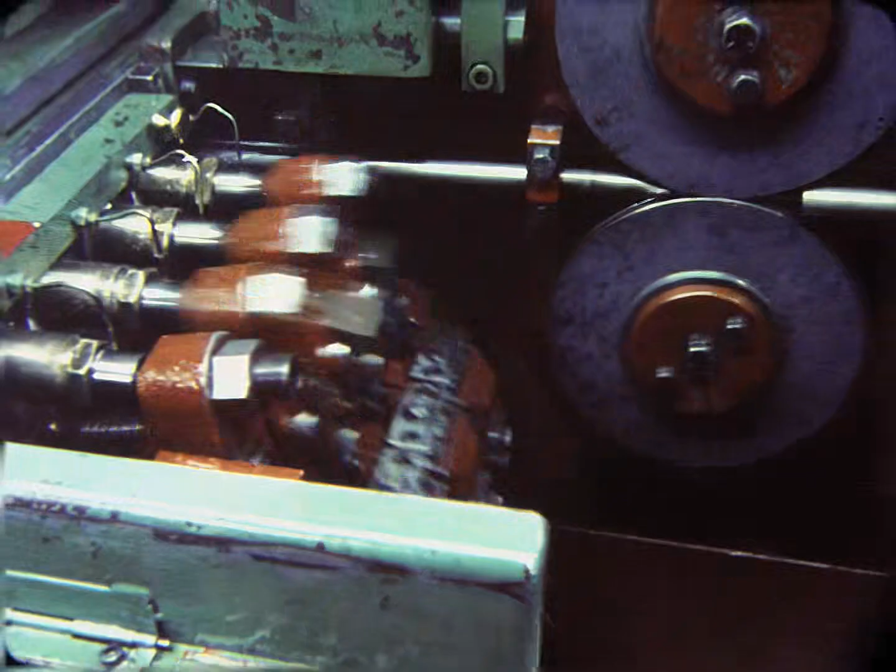The American Society of Mechanical Engineers is a non-profit educational and technical organization of more than 100,000 members. Approximately 85,000 are practicing engineers, and 20,000 are engineering students.

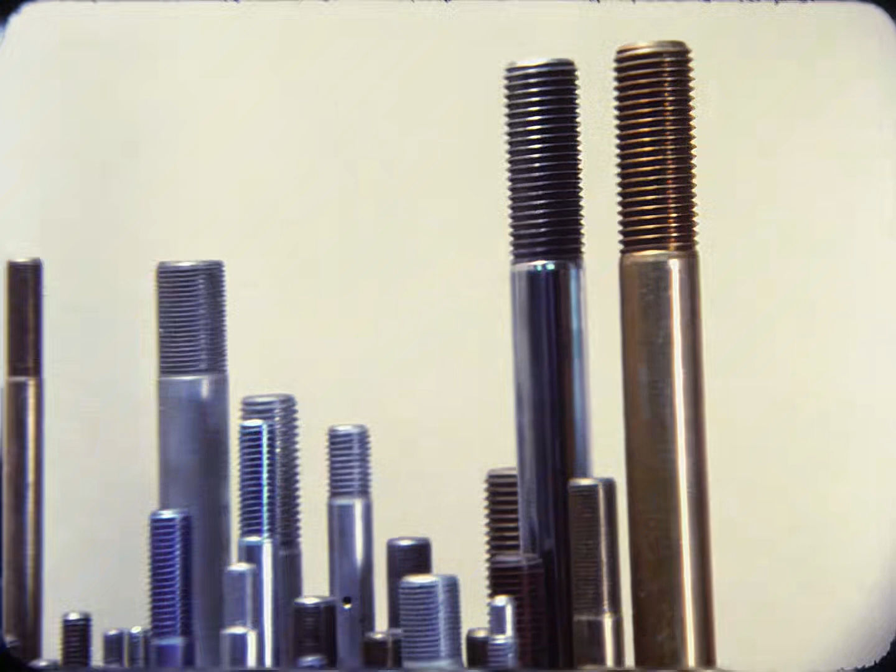ASME has a wide variety of programs: publishing, technical conferences and exhibits, engineering education, and the development of codes and standards, all aimed at serving the profession, the public, industry, and government.

At the Society's headquarters in New York, they're talking about a calendar landmark. ASME Codes and Standards had their birth 100 years ago, when the first performance test code was issued.

Earl Kemmler is a past vice chairman of ASME's Boiler and Pressure Vessel Committee. Ed Bethel is an expert in the field of elevator inspection. Marilyn Weber is on the staff of the American Nuclear Society. Bill Wollicott is ASME's Assistant Managing Director of Codes and Standards.

We've been talking to each other in this Codes and Standards business for about 100 years now, and our centennial's coming up. We've got to find a way to tell people what we do. What will they understand when we talk, for instance, about a boiler? And why are they interested in a boiler? Or why are they interested in an elevator, except that it takes them up and down and then they don't have to walk up and down the stairs?

Basically, what ASME is doing in elevators is attempting to get uniform and safe elevators in our country.

You were talking a little bit earlier about a fire, when they brought some outside fire companies in. They had a very large fire, and as often happens, they had to get help from a neighboring town. When those out-of-town firemen went to hook up their hoses, their couplings wouldn't fit the hydrants. Of course, the blaze got out of control. It was almost as if an old-fashioned bucket brigade would have been more effective.

No matter how sophisticated or modern the firefighting equipment, you must connect the hose to a water source. So we began to understand that just the threads became a very important thing to be standard.

Bill, I think it's important that in citing the various interests that participate in the development of standards and codes, people in general recognize that among those committees are also consumers at large.

I guess you could call me a consumer at large. Turn me loose in a big hardware store and I'm apt to go berserk. Oh, not that I'm any kind of an expert as a do-it-yourselfer. In fact, if it weren't for standardization given to us by mechanical engineers, these would behave like thumbs, all ten of them.

Now, we all have a pretty good idea of what a mechanical engineer does. He makes things work: turn, lift, move, and work. But before things can work properly and safely, they have to fit. For over a century now, that's what the American Society of Mechanical Engineers has been doing in an organized way, making sure that things fit and work.

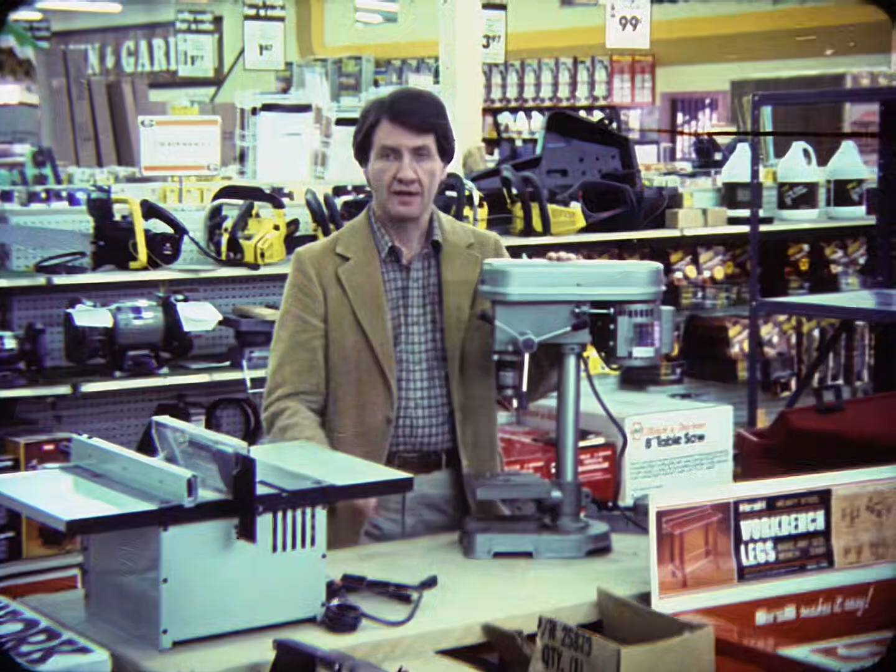Whether it's a bolt and nut, a new bit for your drill, a new pipe fitting, even if you're the most skilled plumber or carpenter, you work with things that are ready-made to fit to the most exacting specification. They fit because mechanical engineers take responsibility for developing standards, without which—well, early Hollywood took a comic look at what would happen without which.

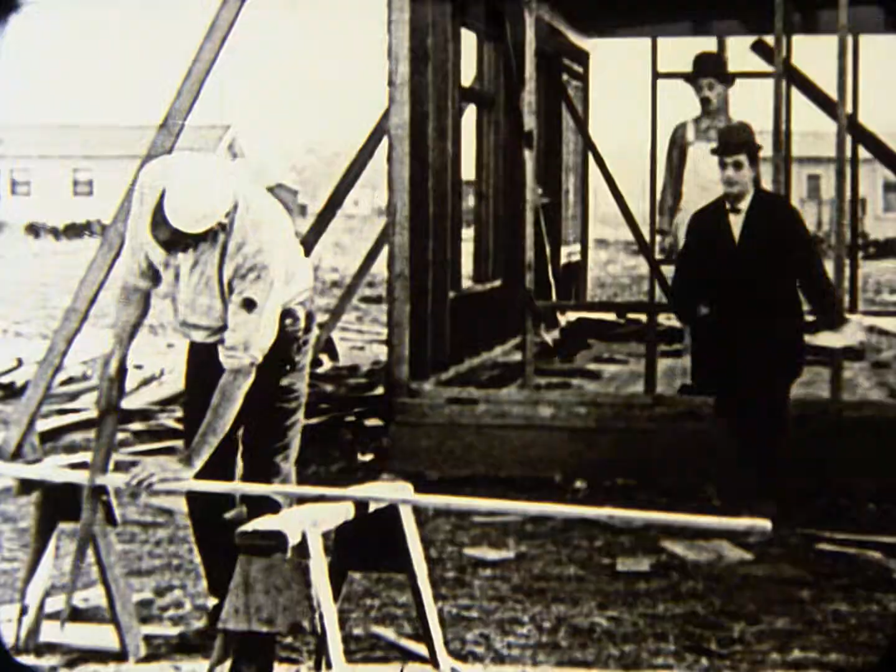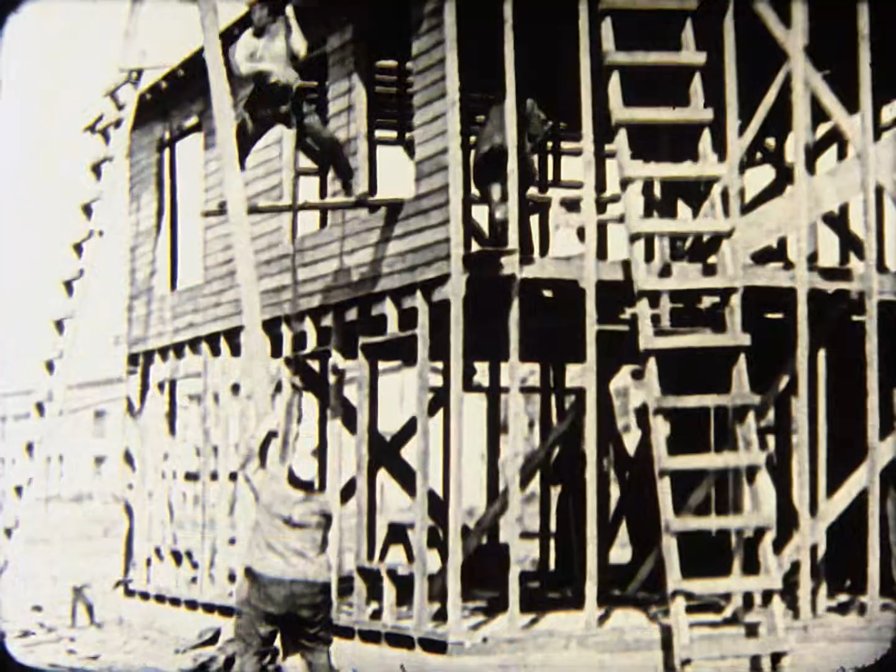Even to my untrained eye, this structure doesn't seem to be going up according to rhyme or reason, let alone professional standards.

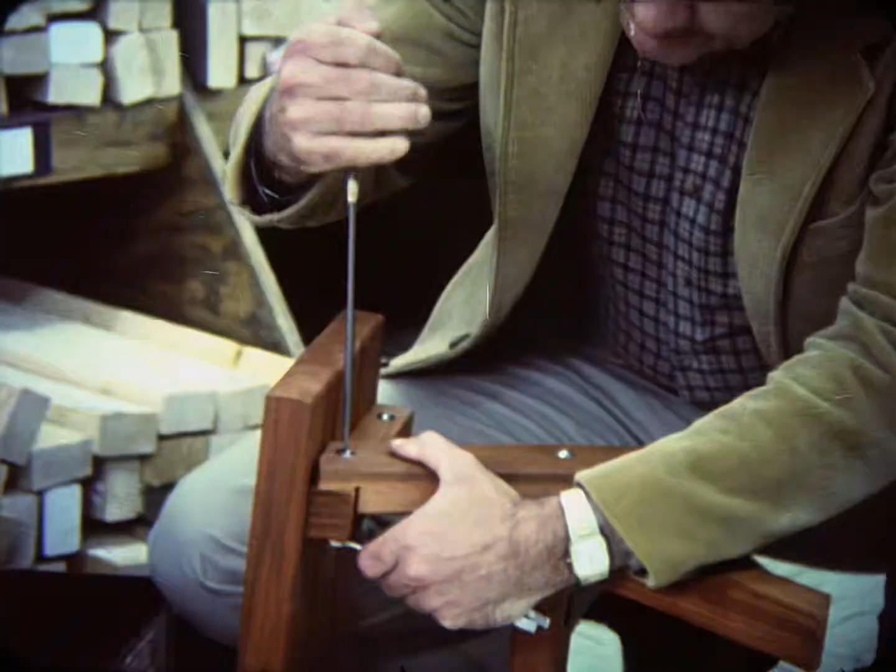I don't think I'd want to audition for a Mack Sennett comedy, no matter how much some folks might think I qualify for the role. See? Put it together myself, and it isn't falling down. Nothing to it.

Before my visit with you is over, we'll be looking at many things, from nuts and bolts to elevators, escalators, boilers, cranes. We won't even be able to cover all of the devices that affect our daily life. The design for these devices and machines have their starting point in common, uniform standards.

These engineers and other volunteers will be serving on codes and standards committees. They are here to learn about some of the issues involved: professional ethics, conflict of interest, and legal considerations.

Going back to 1884, when I used the word code, it was with the intent that it was going to be made part of a legal document. The legal document was a contract. So I think that ASME has followed that from 1884. That's the way I understand the use of the term code.

Each of these code-writing committees is balanced so that all points of view and all interests can be represented at the table, so that the possibility for one group or another to inadvertently or purposefully skew or manipulate the system is diminished, because everybody's there keeping an eye on everybody else.

Today, as always, we are faced with the fact that if voluntary standards are to survive in a free society, we must cultivate the science of human relationships and the ability of the code writers of all categories of interest to work together towards goals which are worthy of an alerted society.

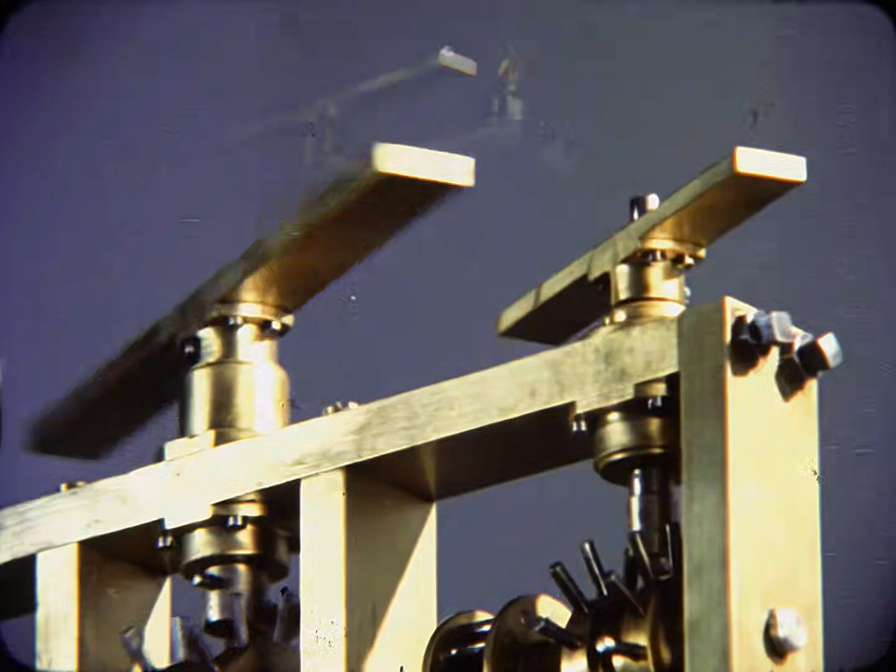A mind like da Vinci's inevitably would have to tackle the measurement of time. He designed a clock with two separate trains, one for minutes, the other for hours, each complete with escapement, gears, and weights.

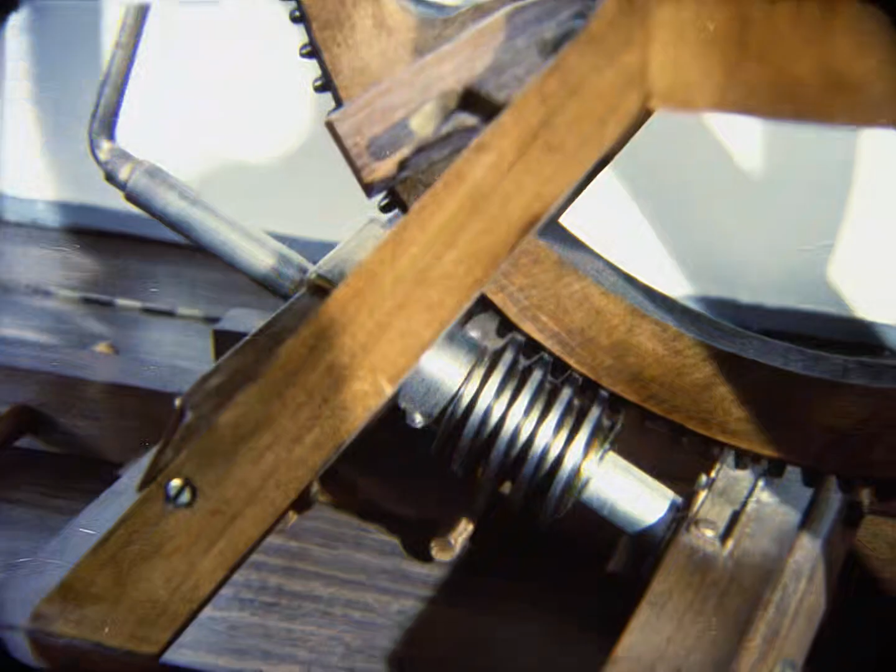Leonardo's scaling ladder, elevated and lowered by means of a crank and large-toothed gear, resembles modern firefighting equipment and cranes.

This rotating bridge was originally designed as a defense against approaching battalions.

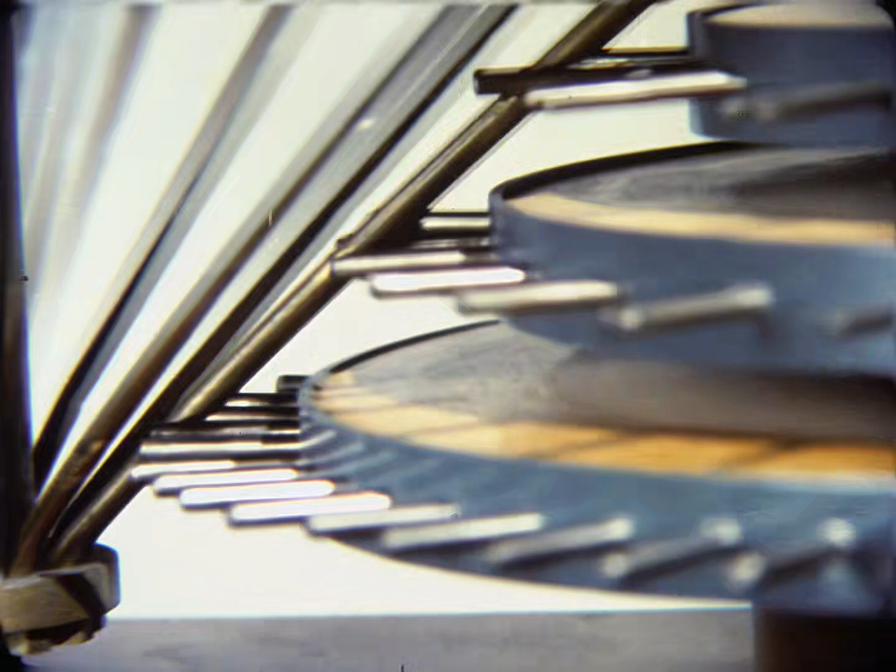By meshing three cogged wheels of different diameters with the same lantern wheel, Leonardo obtained different speeds of rotation, an idea that eventually found its way into the modern automobile. The visionary light that illuminated Renaissance art and science is no less penetrating today.

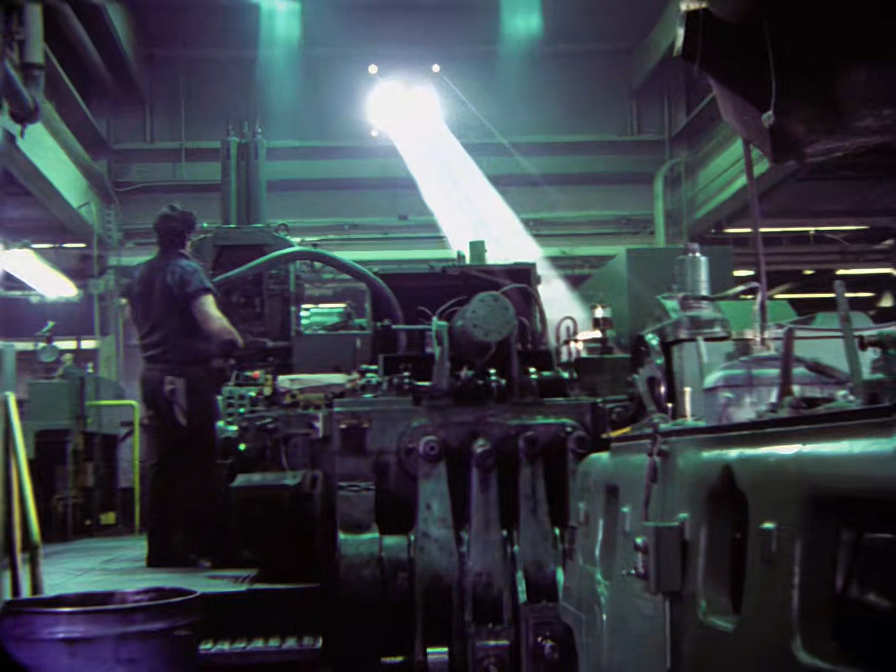Converting a long length of heavy wire into bolts or screws that hold together everything from a lawnmower to a skyscraper is a process that boasts its own magic.

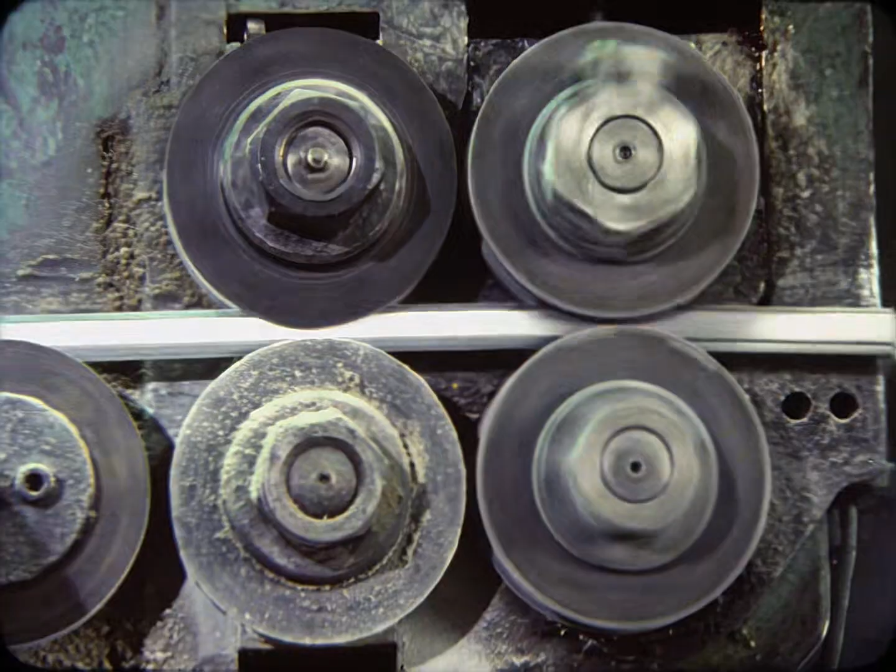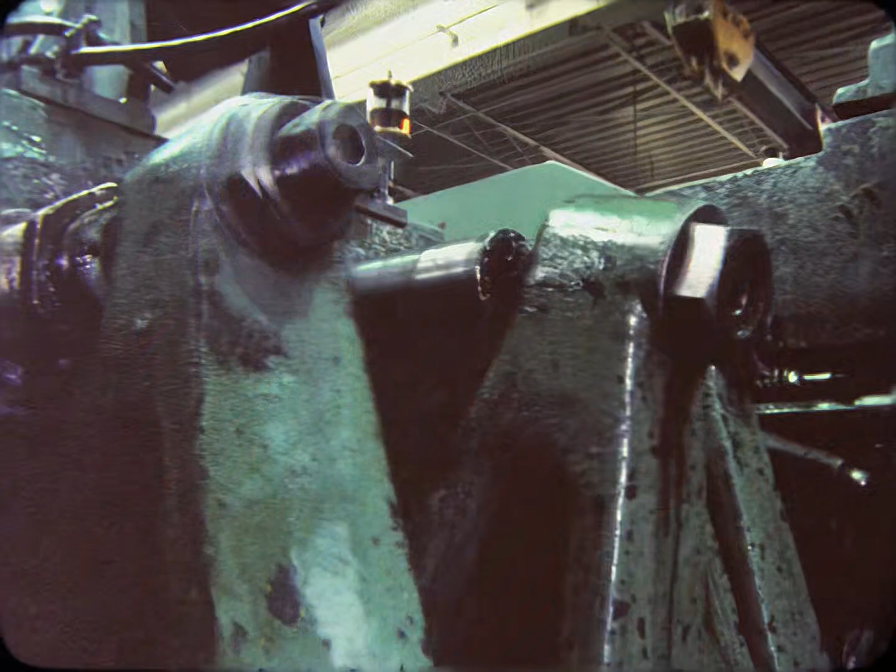With the wide variety of fasteners being manufactured today, it's important that the designer, the manufacturer, and the user of fasteners as well have a good, concise set of standards to work to.

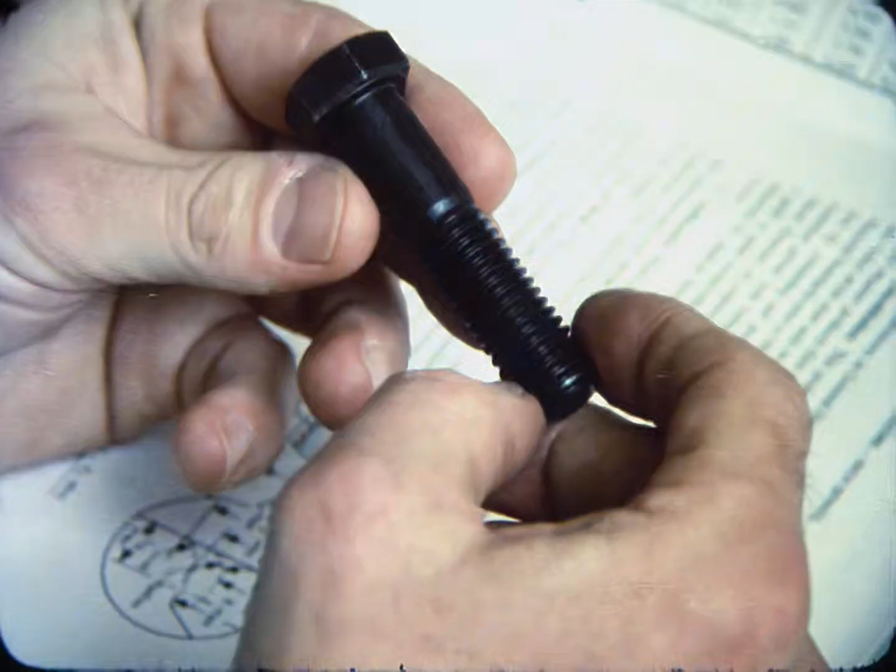The American Society of Mechanical Engineers B1 and B18 documents completely define all the characteristics of a hex head cap screw. Dimensional characteristics such as bolt length, thread length, distance across corners, head height, body diameter, and all of the thread information are concisely contained in both of these documents.

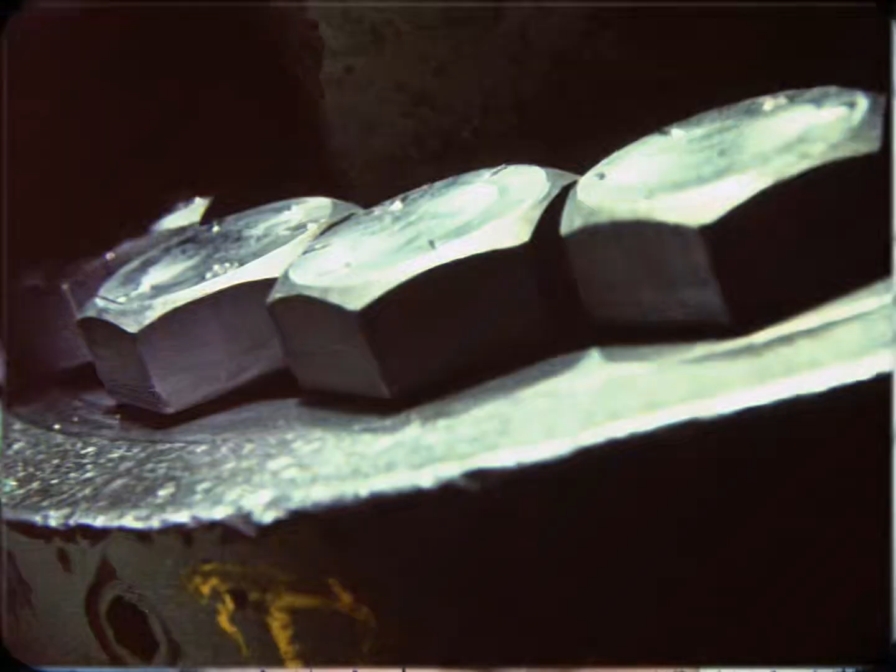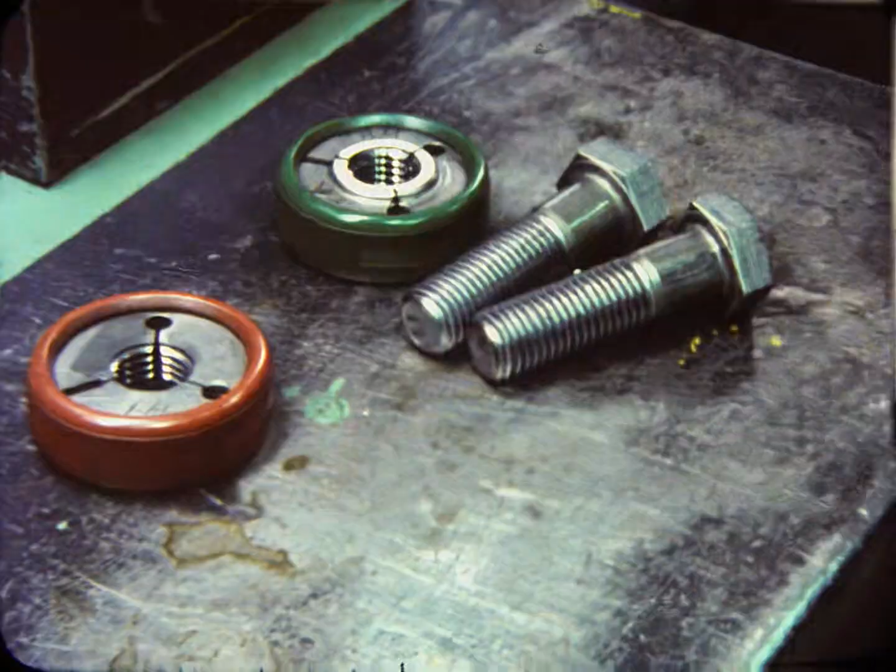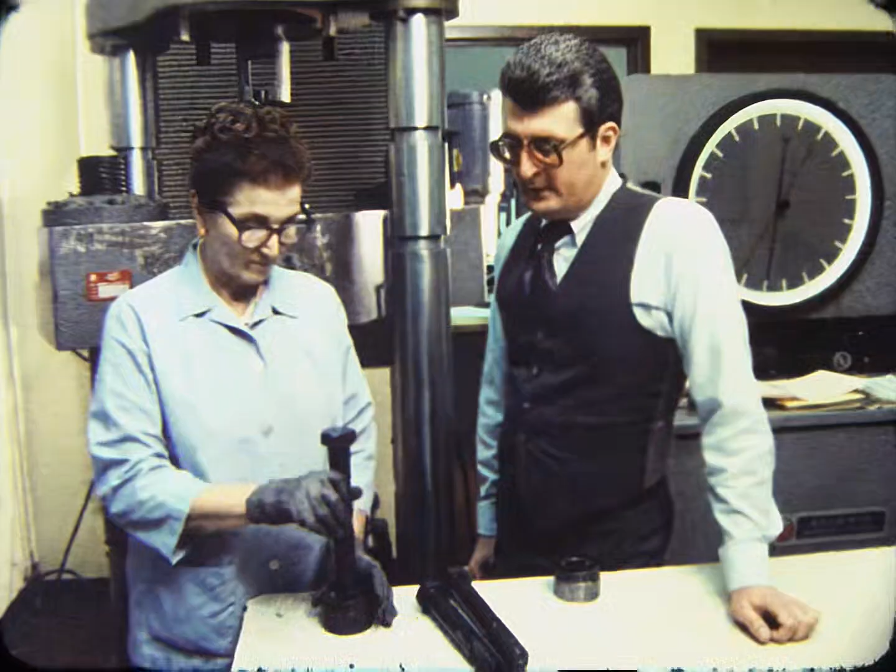Take a bolt and a nut, put them together and they fit. And the reason they fit is because of standards. The tensile test is a mechanical evaluation of the minimum strength properties built into the bolt by specification.

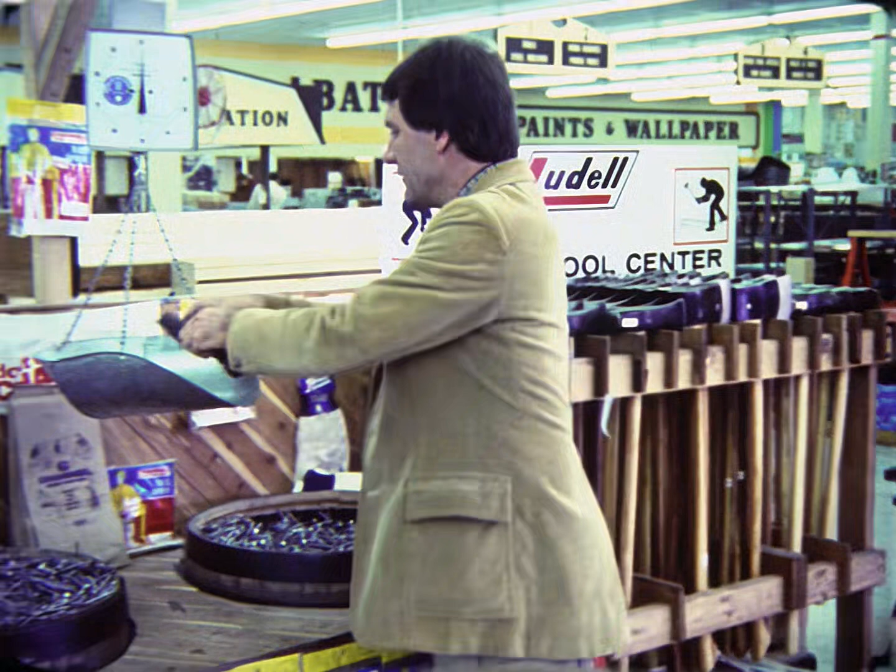You have to know how much weight or stress a fastener can take before it yields. This stress test of a heavy structural bolt will take it far beyond the performance requirements before it snaps. It took 80 tons of force to break this single 4-pound bolt. In manufacture and design, it meets the ASME standard.

Unfortunately, there are no codes or standards that can protect us from human error. Even so, when accidents happen, we have to hope that something man-made will hold.

In New York, witnesses say it felt like an earthquake and sounded like the world was coming to an end. Without warning, pedestrians on 53rd Street were caught in a downpour of rock, glass, and metal as the crane collapsed 43 stories above their heads.

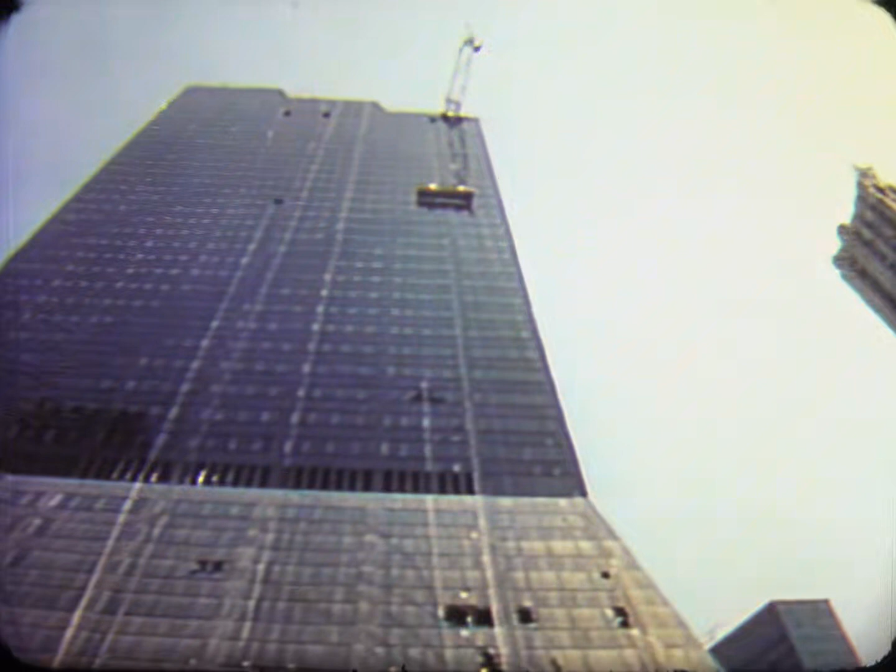The accident occurred a little before 11 this morning at the nearly completed Continental Illinois Bank building. Workers reportedly were dismantling a 130-foot crane when it collapsed on the roof, smashing into the concrete facing. More than a dozen windows in the building were shattered. Windows in buildings on Madison and 53rd were also broken.

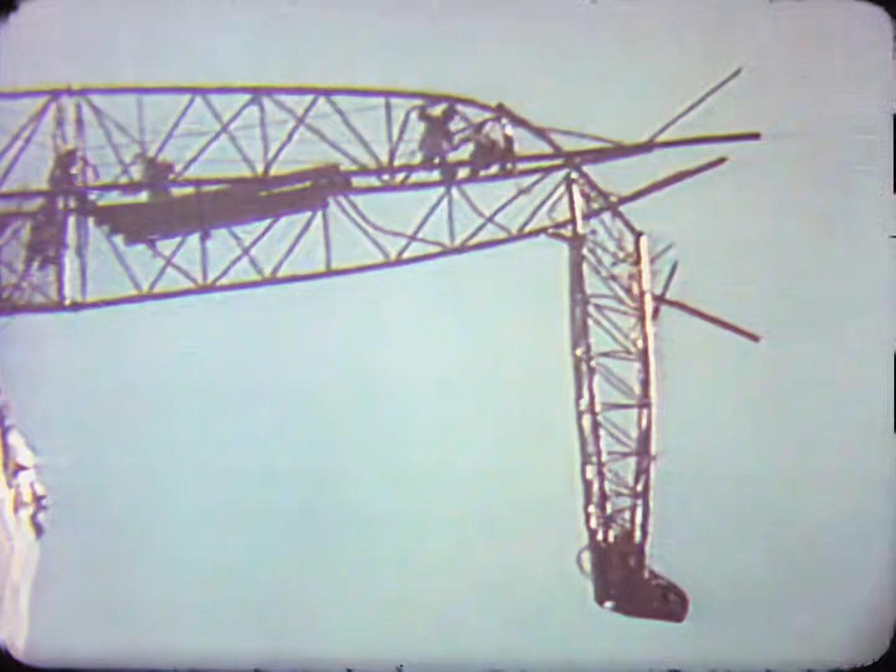Officials didn't know how long the 30-foot section would hang on. After the area had been cleared, construction workers and police were left with the dangerous task of trying to secure a dangling 30-foot section of the crane, being held only by one bolt.

At any given moment around the world, thousands of cranes of every size and description are helping to build and rebuild man's dwellings, office structures, and factories. Among the most spectacular applications of reliable codes and standards, cranes punctuate cityscapes like giant arms flung into the sky.

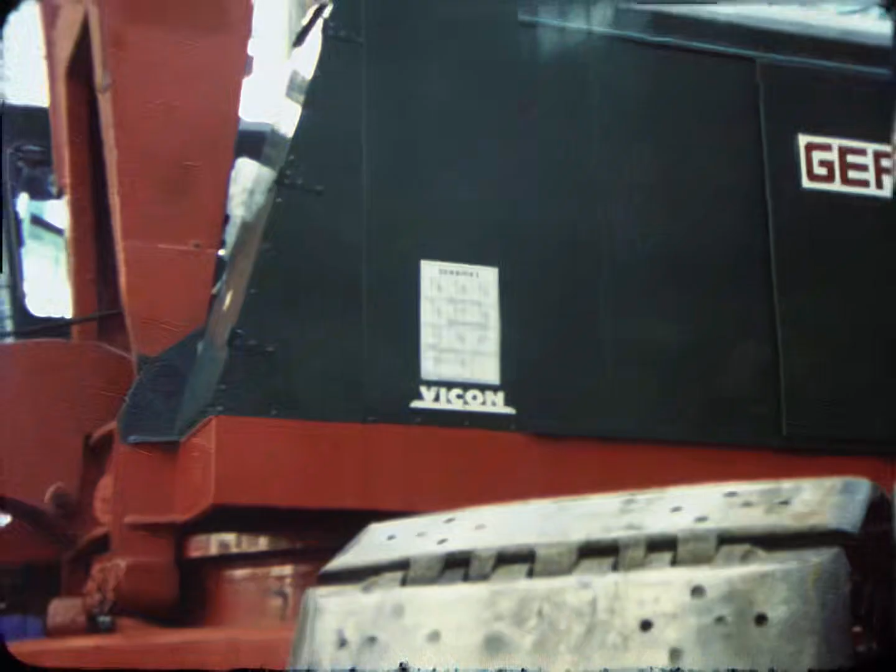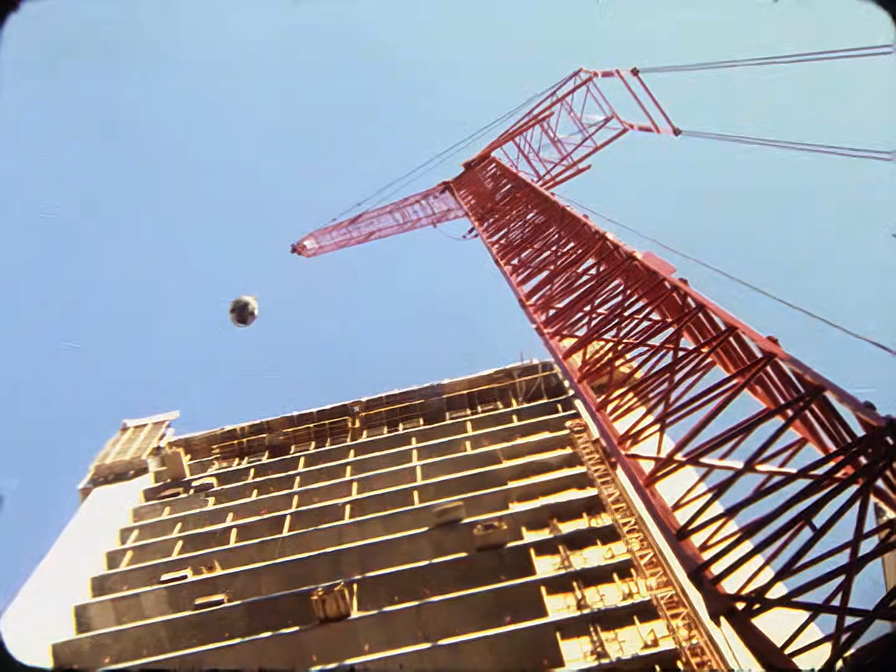The basic philosophy that guides the development of codes and standards is clear. With staff assistance, working committees keep abreast of every phase of new technology. They don't wait for accidents to happen. Every problem of manufacture and every planned use are under close study all the time. The engineers and other informed volunteers who serve on the committees that write the codes and standards work hard and long to cover every inch of ground.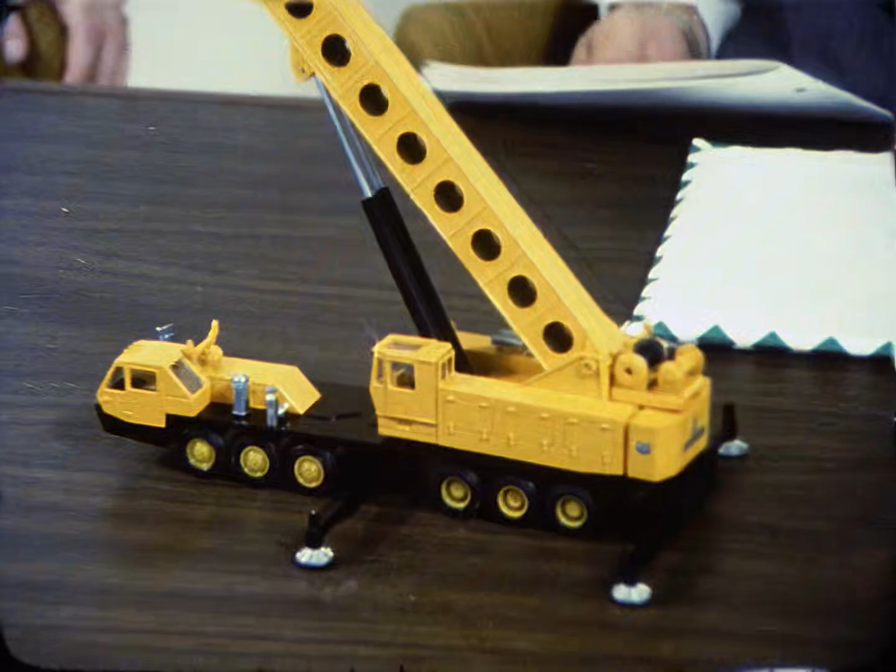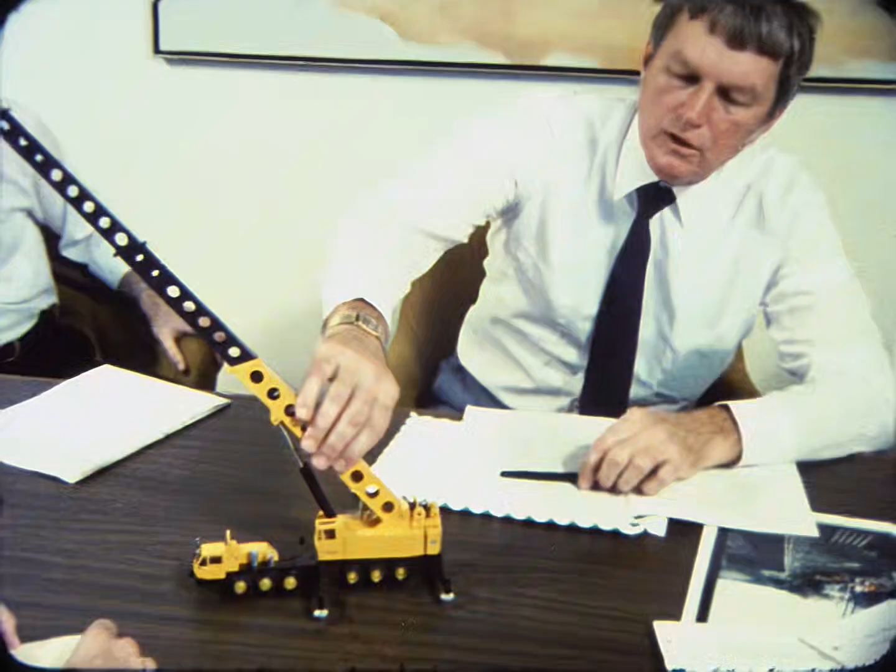We've been asked to begin revisions of these crane standards in accordance with the new ASME operating procedures. Right now we're looking at the standards on portal, tower and pillar cranes, overhead and gantry cranes, and industrial crane trucks. In the standard as it presently exists, we've left a great deal of identifying the requirements for the outriggers and service conditions for the outriggers to the manufacturer. Floyd, can you tell me whether it's the lateral spacing between the outriggers, or is it the extension distances as related to the total height and lift capacity? I think our action to date hasn't truly reflected all of the service conditions that the outriggers may see.

The chairman and staff member remain to review the minutes of the first meeting of the Crane Code Committee. Over a period of many months, there will be extensive study and many more meetings before a new crane code is hammered out.

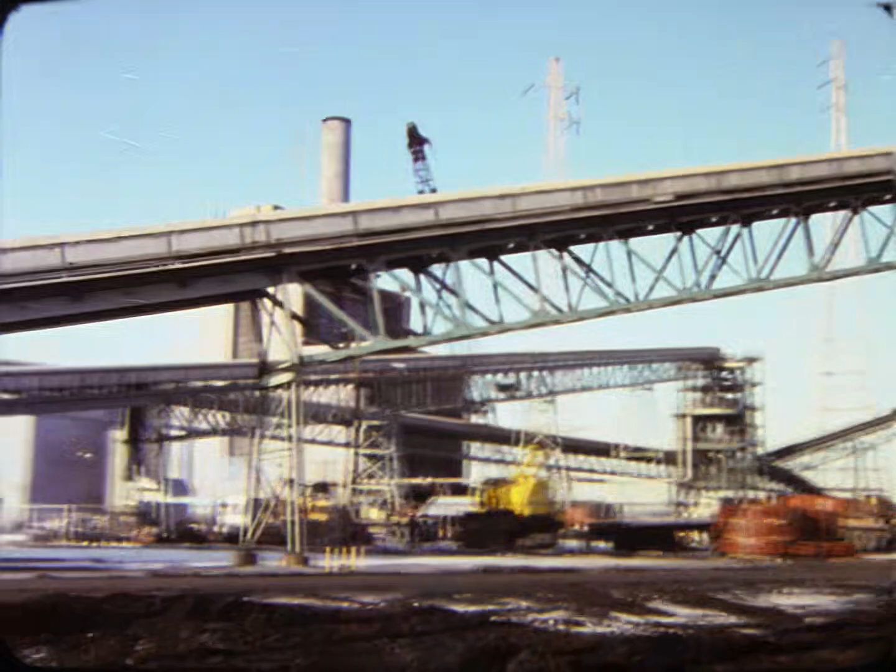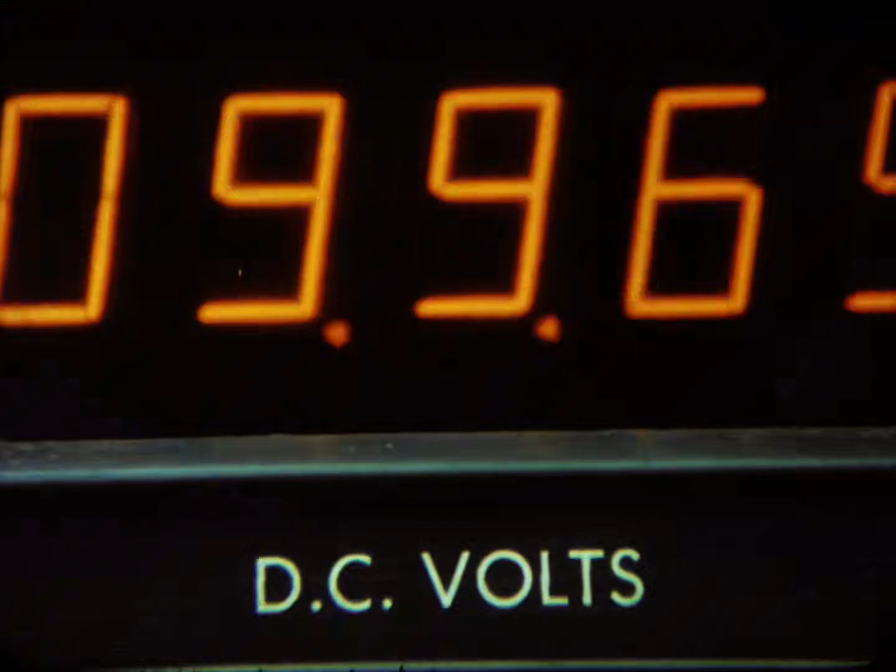Mechanical engineering has to do with the generating and harnessing of power, including the everyday power that we kind of take for granted. We seldom think of the tremendous equipment and the complicated controls that lie behind a light switch.

Most of the power in this country comes from either hot water or steam. And that hot water or steam doesn't care where it gets its source of energy, whether it comes from a nuclear plant, whether it comes from coal-fired, gas-fired, or oil-fired.

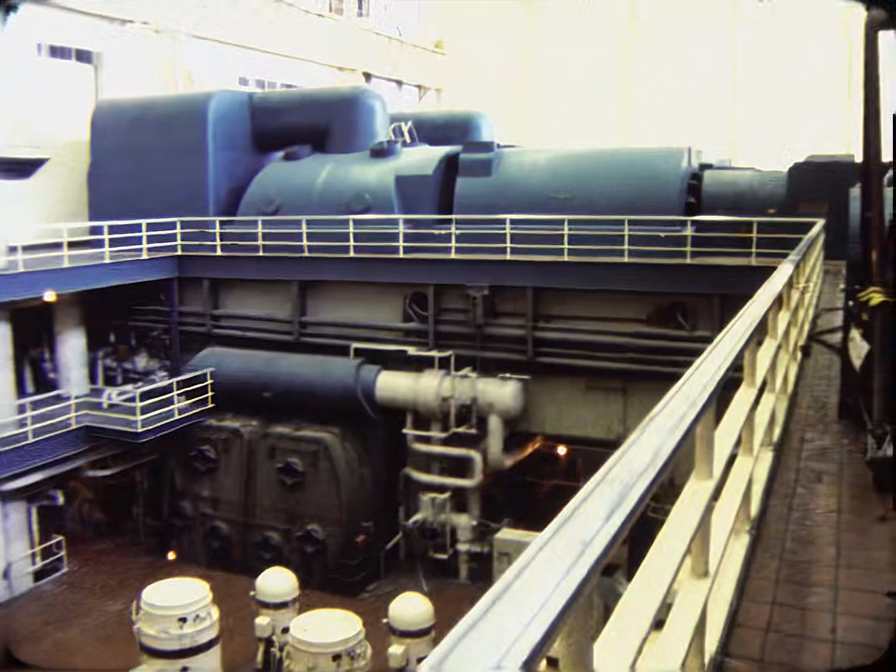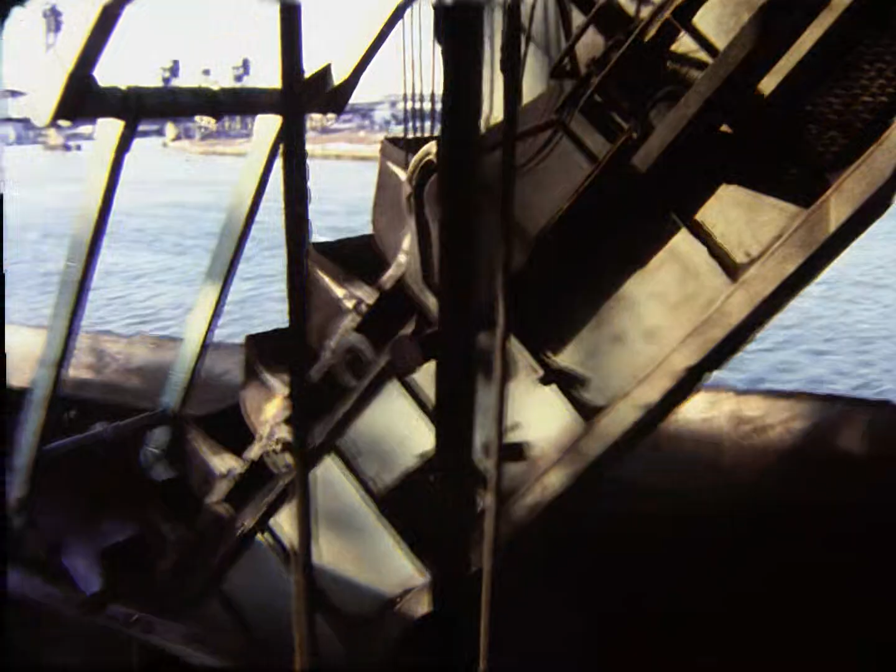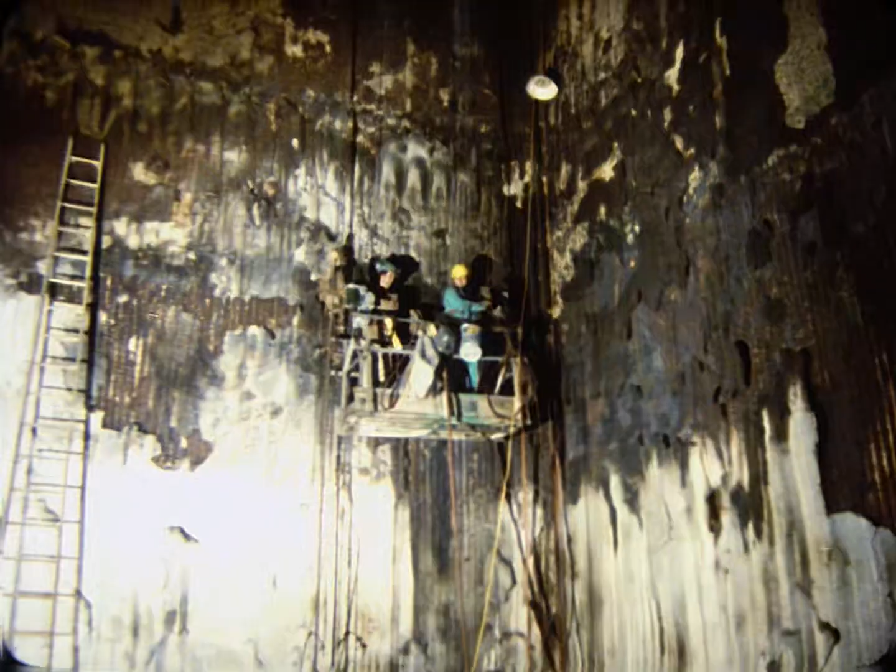At this electric generating plant, the energy source is coal, and its job is to fire up huge boilers. The standards to which they are built also require their periodic shutdown for careful inspection. Tubes have to be gone over for pinhole leaks and welded. Insulation is checked. Each procedure assures a margin of safety before the boiler is fired up again and placed back in service.

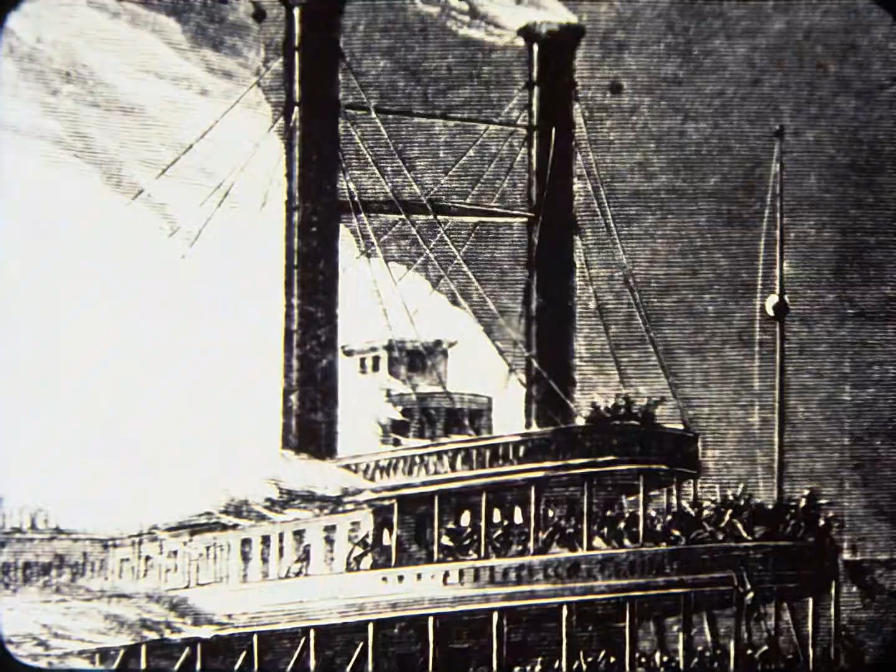An interesting thing that very few people in the country today remember might help the public understand how boiler codes eventually got written. It goes way back to the Civil War, when the Mississippi River steamboat Sultana was bringing Union soldiers who had been prisoners of war back home up the Mississippi. The boiler on that boat exploded, and it killed well over 1,400 soldiers. And from that day, people in this country went to work to develop standards to make boilers safe.

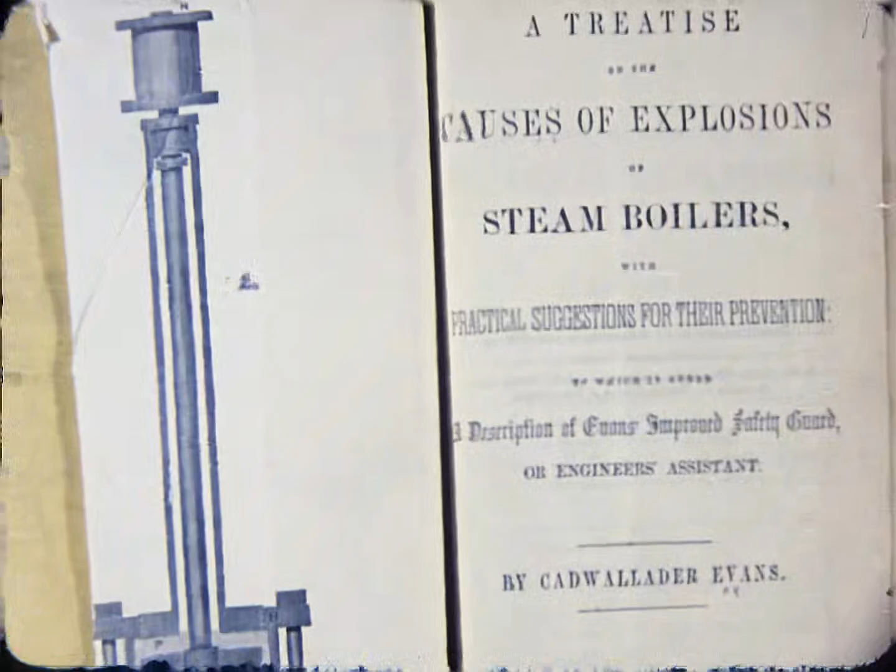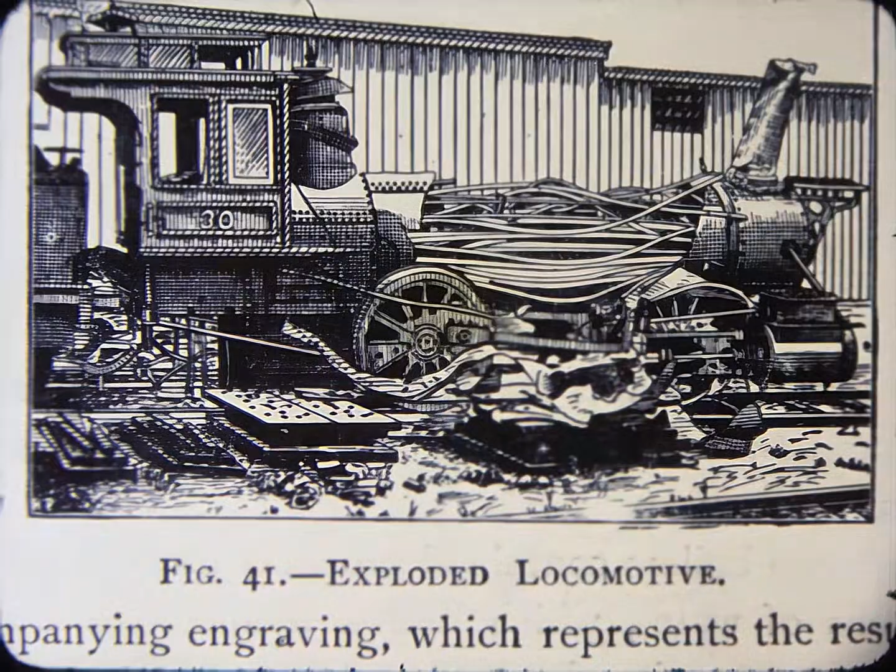There was a time during the 19th century and into this one when horrendous boiler explosions were almost a daily occurrence. Damage was staggering. Many people were killed or injured.

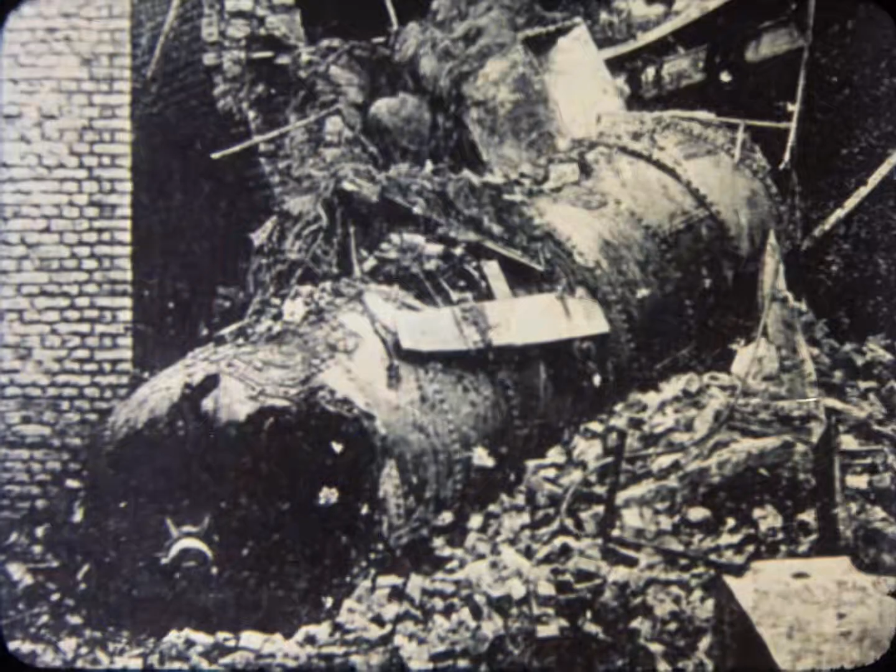ASME got to work on a series of boiler codes which set standards for the construction, maintenance, and testing of boilers. Accidents didn't stop overnight, but as the codes won greater acceptance, the grim statistics descended to the vanishing point.

As we became more comfortable with boilers, we could accept some humor on the subject, and the movie makers of the time were inventively eager to oblige.

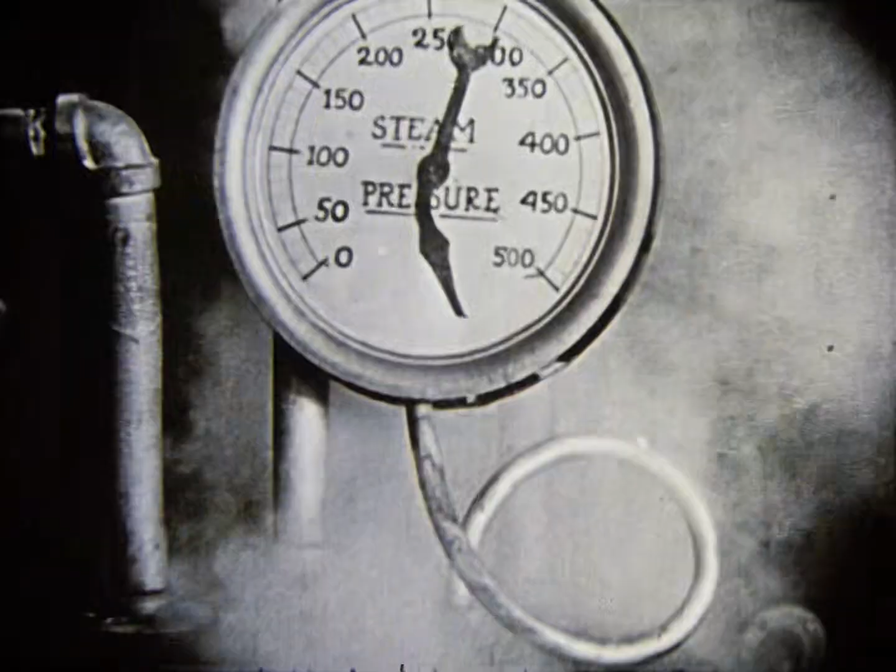It ain't rubber, that's for sure.

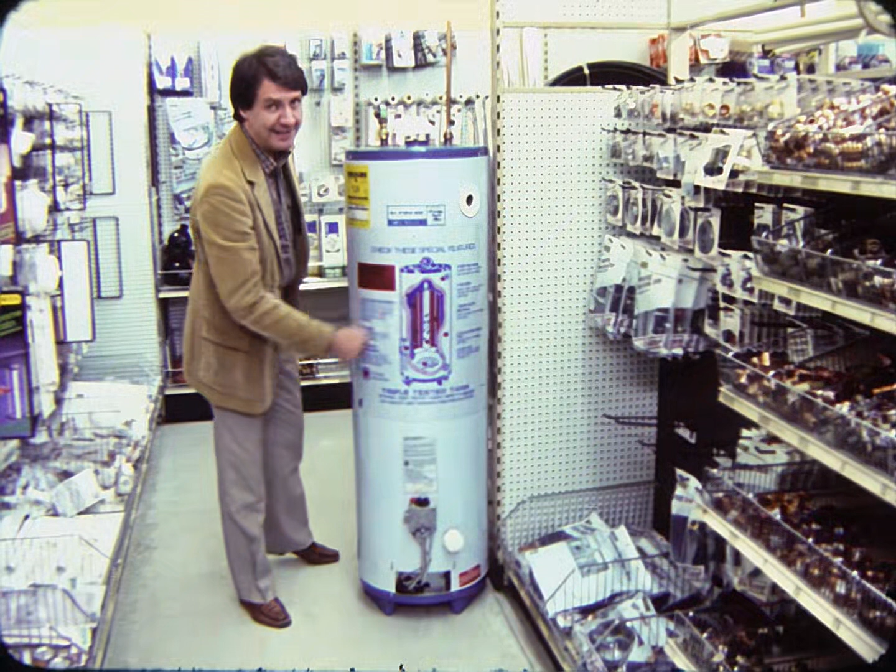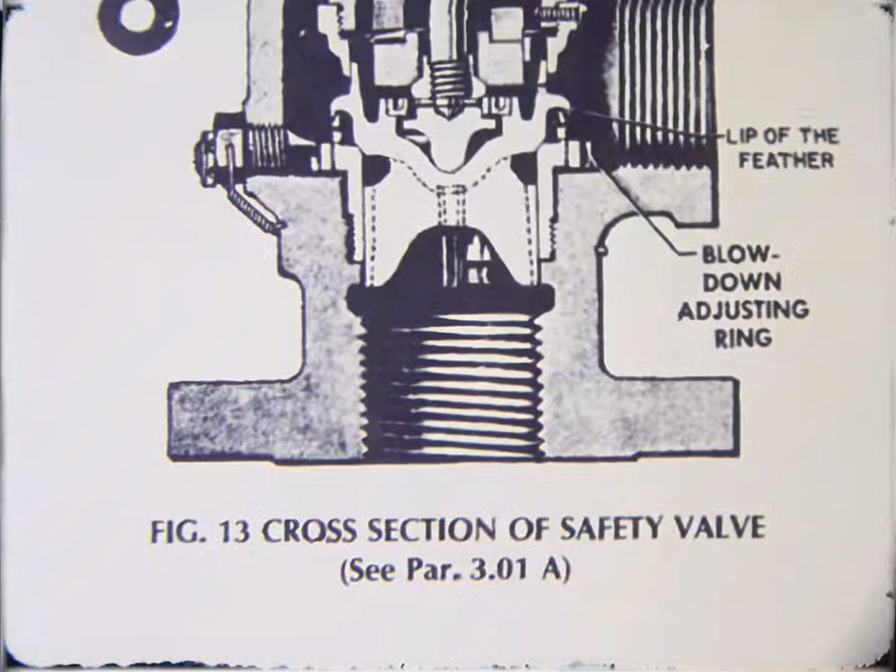If you have one of these around your house, you probably don't pay much attention to it. Carefree, so to speak. Thanks to this little spring-loaded device called a pressure relief valve, the margin for safety is built in. The very first ASME code was for boiler testing, and it goes back to 1884.

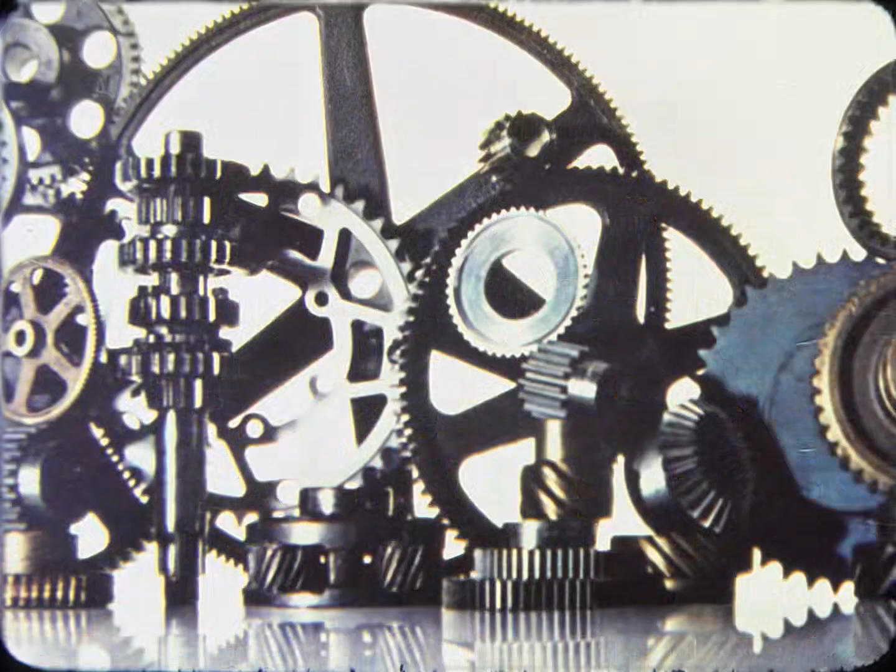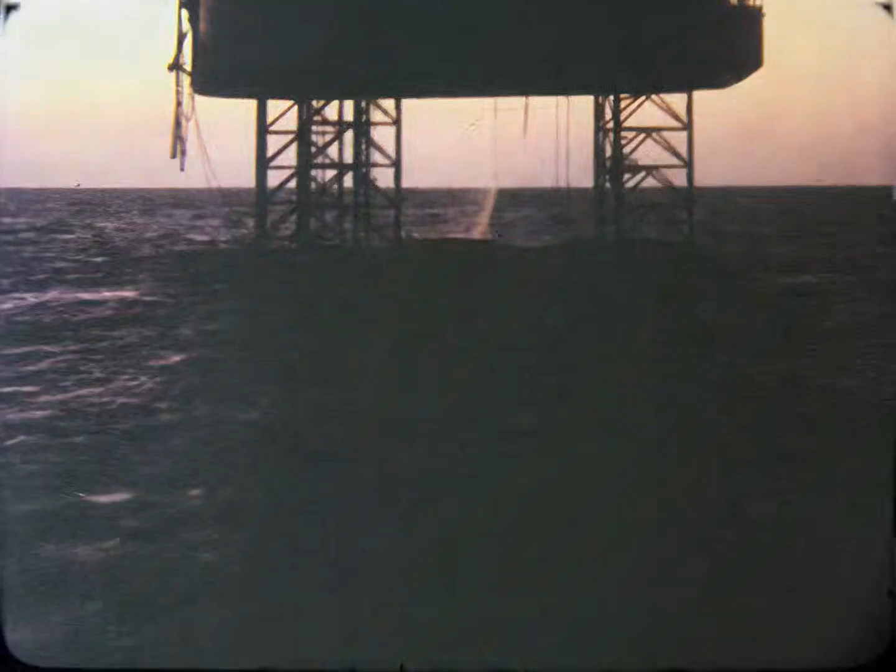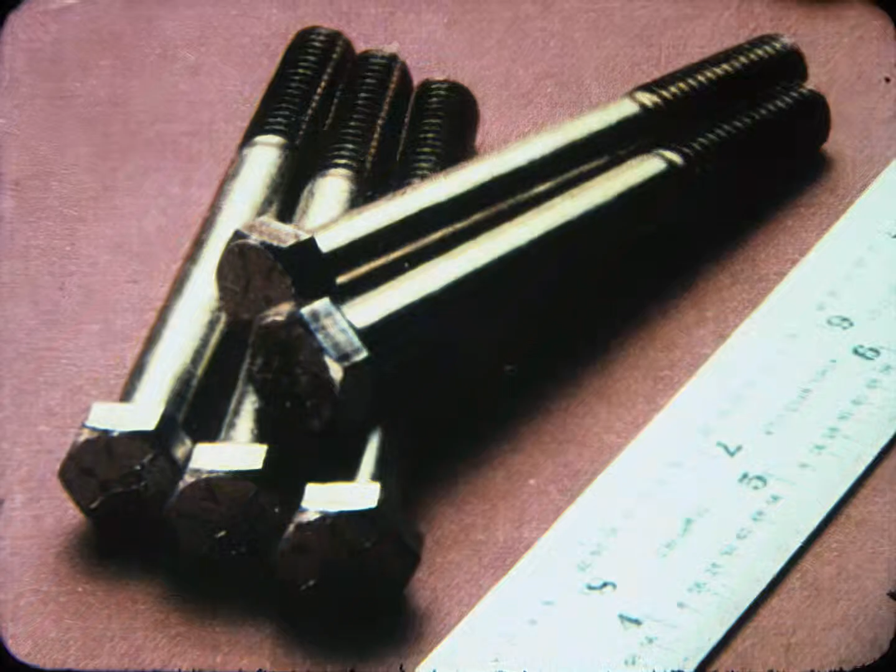That's when ASME began organizing balanced committees to develop standards that would be absolutely practical. These publications contain carefully written criteria for all kinds of machinery and testing processes. And they contain language that actually can be written into purchase orders and contracts. Engineers, manufacturers, users, and regulatory bodies have been using these documents down through the years to minimize mistakes, misunderstanding, inefficiency, accident, and maximize reliability, economy, and safety.

Several months after the first committee meeting, the work on revising the ASME crane code continues as volunteers review the details and all the issues. The scopes of both standards need to be bolstered, and we need to identify and standardize a greater area of equipment which is included in these standards, which heretofore have been left to the builder.

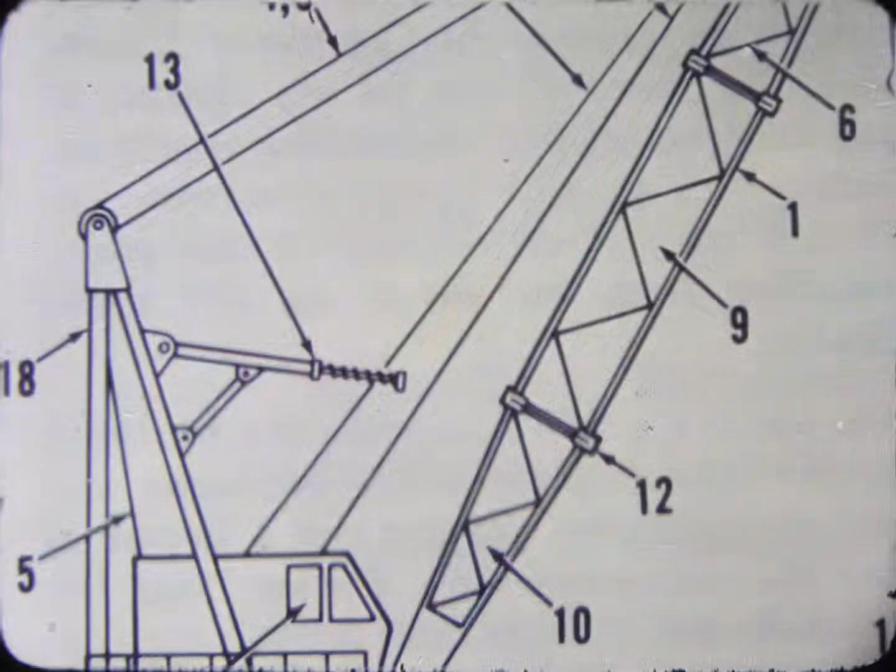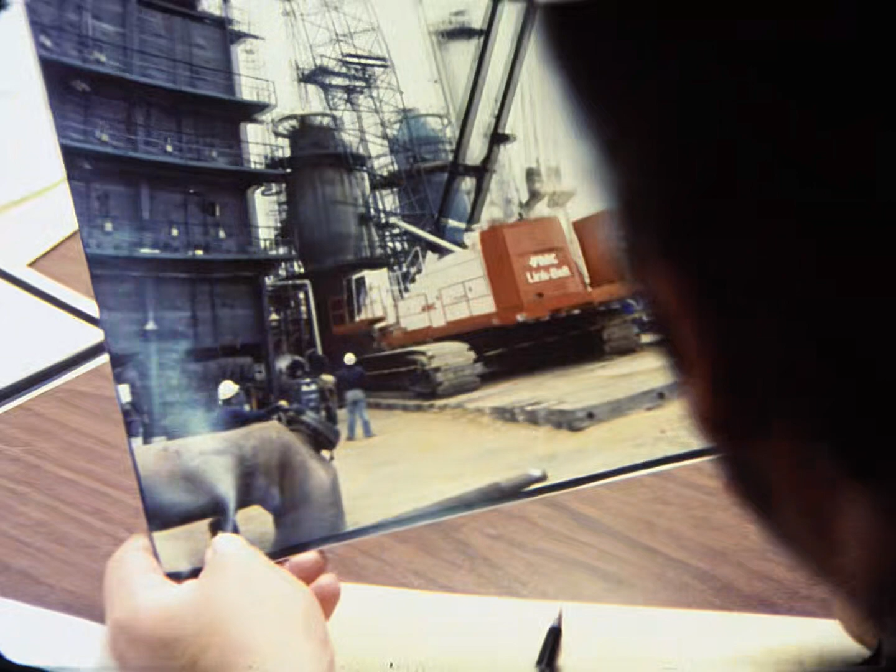Well, the scope of these standards isn't just the design and construction, which I think is a very separate subject from the subject of the qualification of operators of cranes. So I don't think we're talking about just two standards. I think we're looking at the subject of what standards are really needed to cover cranes.

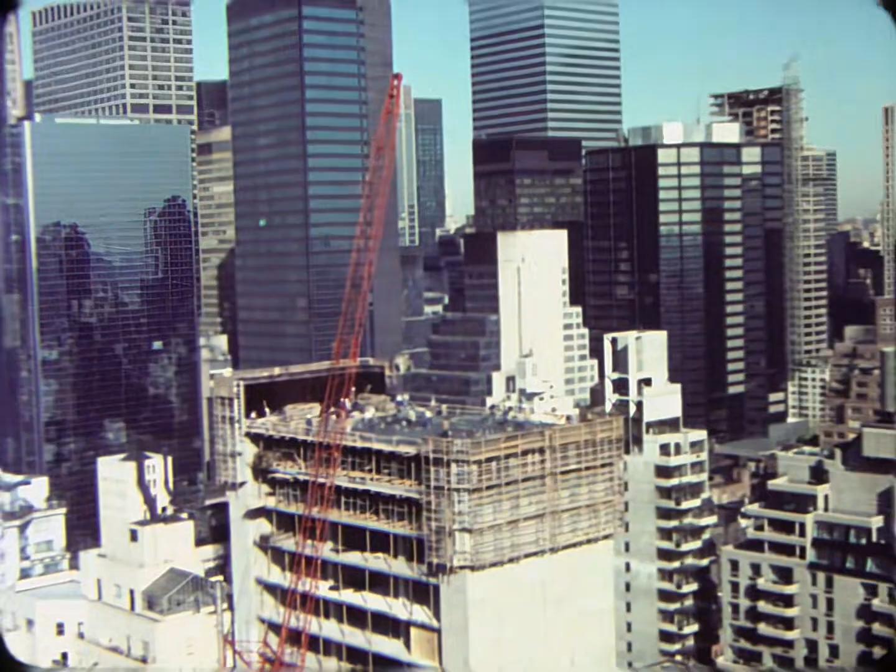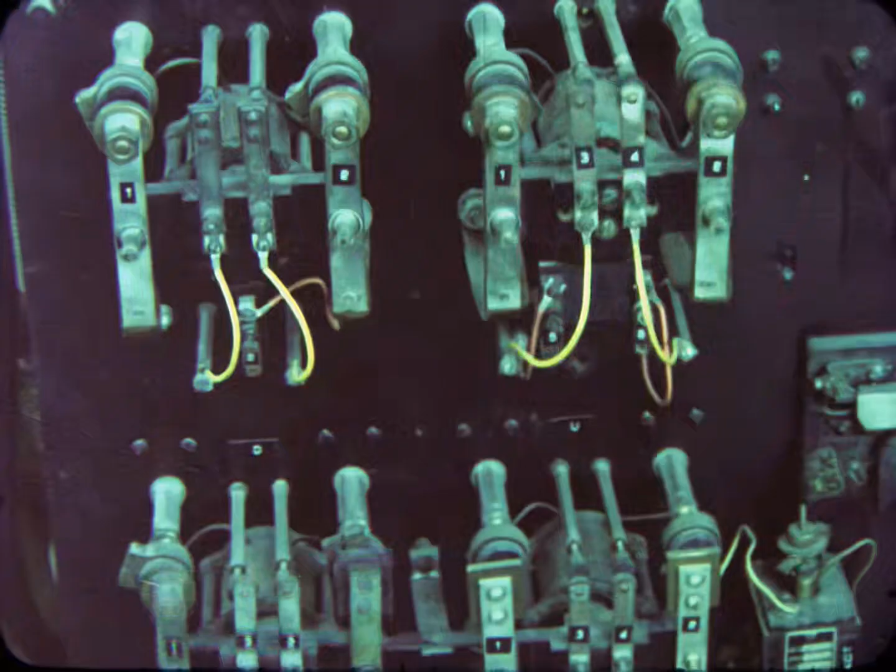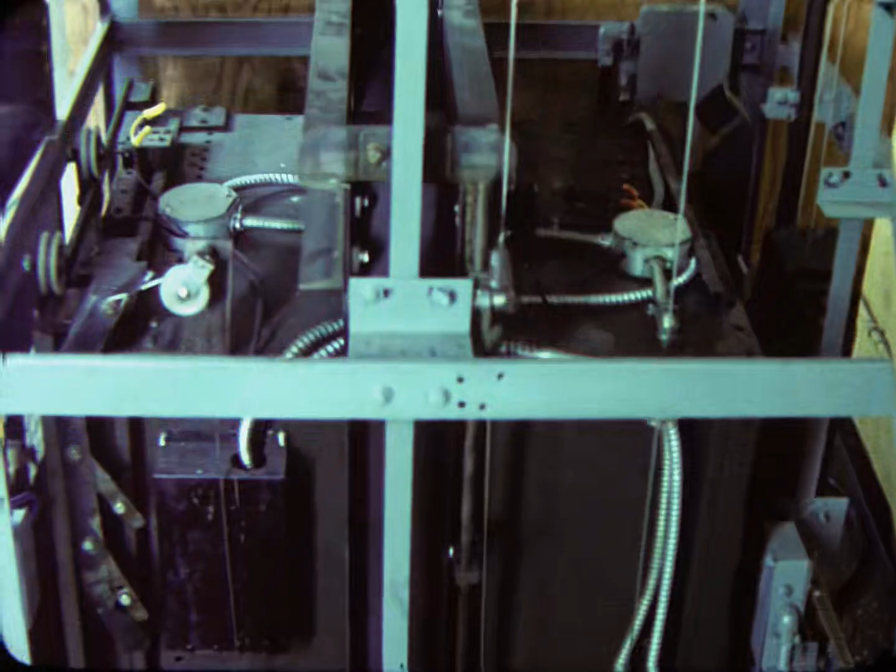A crane is certainly one of the most conspicuous things mechanical engineers design. I don't imagine you've ever ridden a crane, but there are other things that lift and carry with which you come into personal contact. You depend on elevators to go up and come down like they're supposed to. And even if they get stuck, which isn't very often, they don't fall down. Not anymore. The whole system, including safety mechanisms, adheres to those ever-present ASME standards of design, manufacture, and maintenance. Elevators are the safest form of transportation we have in the world today.

However, anything that's good can always be better. And I think that's what our elevator code is all about. When you use an escalator, you're confident that it won't do something funny like hurtle you into the lingerie department or suddenly reverse in the middle of taking you up or down.

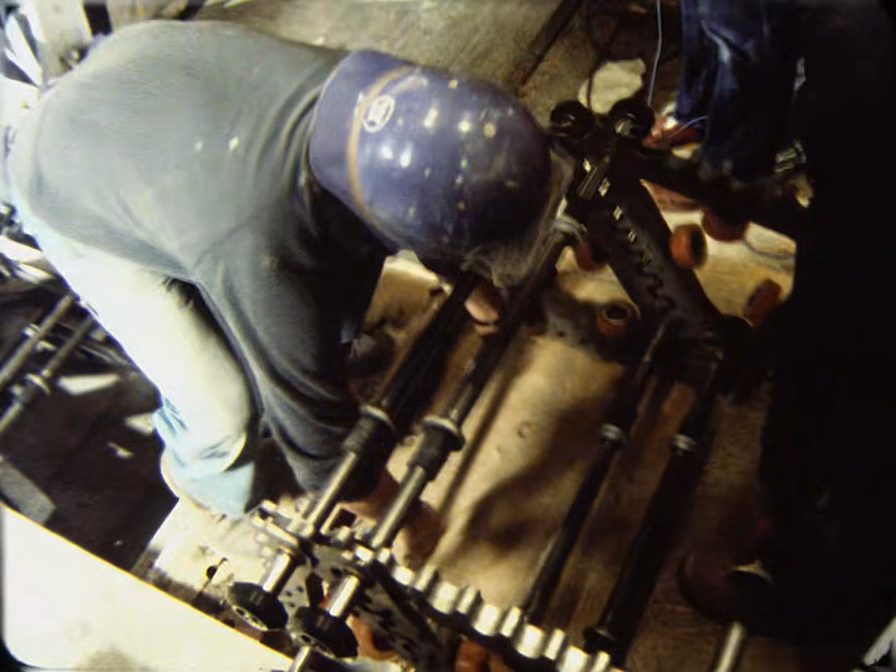Unless you happen to be around when they're installing an escalator or putting in new parts, you'd need X-ray vision to appreciate what makes those steps travel round and round. The motors, wheels, chains, and gears operate smoothly and almost silently as you think idly about where you've been or where you're going. Moving things around and making things fit—that impulse is built into the human character almost from birth.

You're looking at mechanical engineers. Well, I'll bet you some of them will grow up to be real ones. They'd better. For progress depends on minds and hands that will give us new machines and improve on the old ones. If that doesn't happen, things won't continue to fit or stay put or work.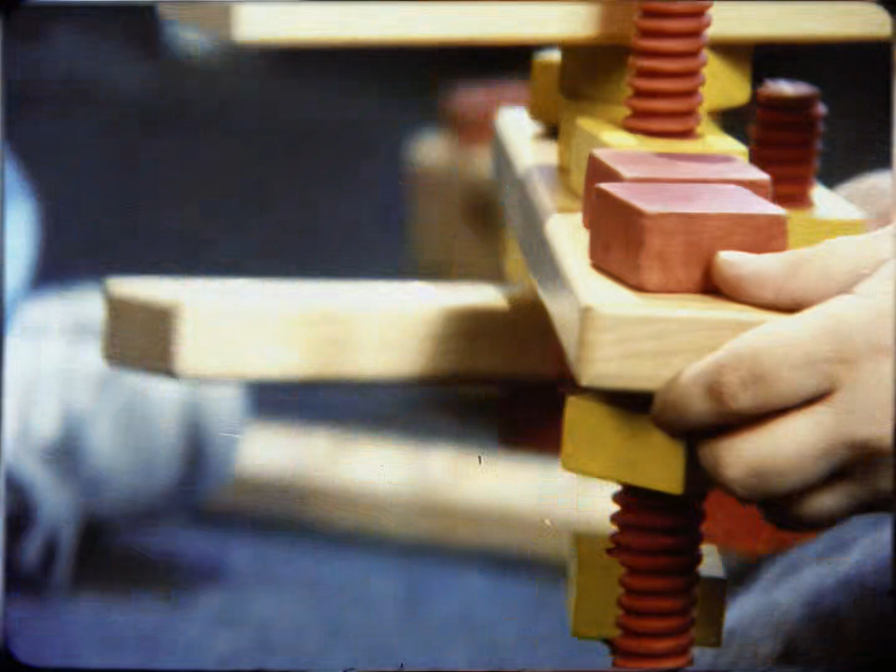It's fun to play with models, but for these grown-ups, it's serious business. What you're looking at are the small-scale prototypes of the working innards of nuclear power plants.

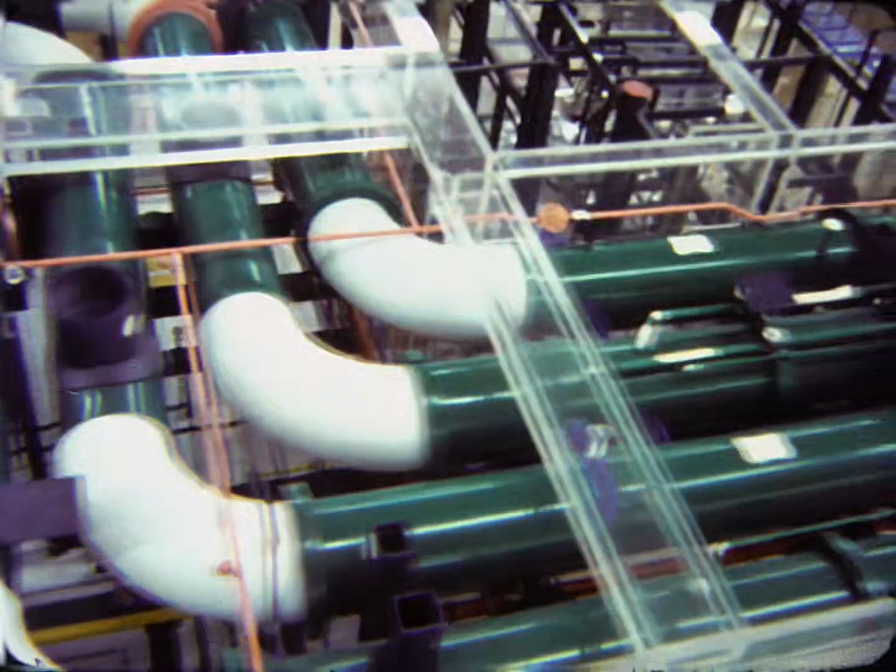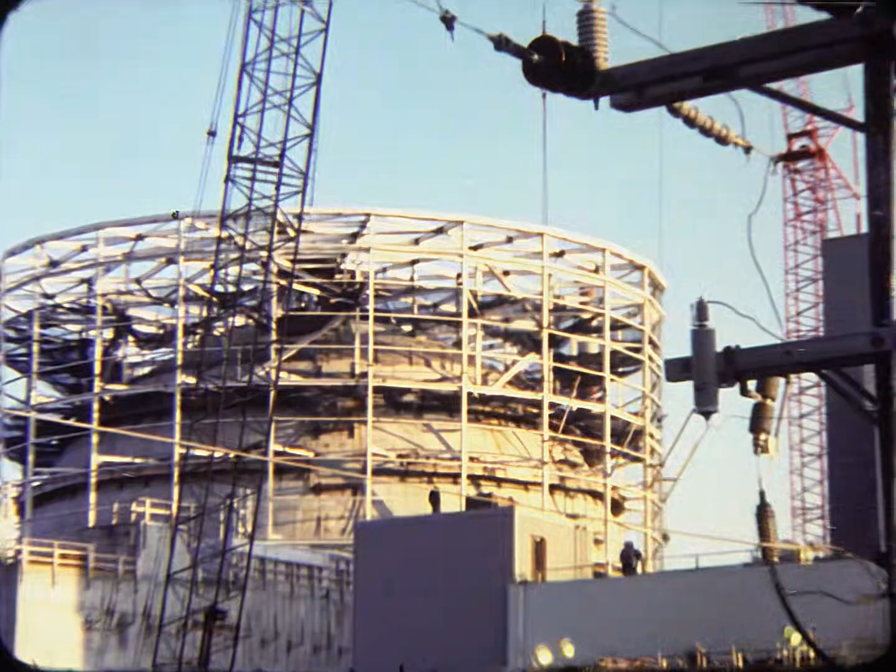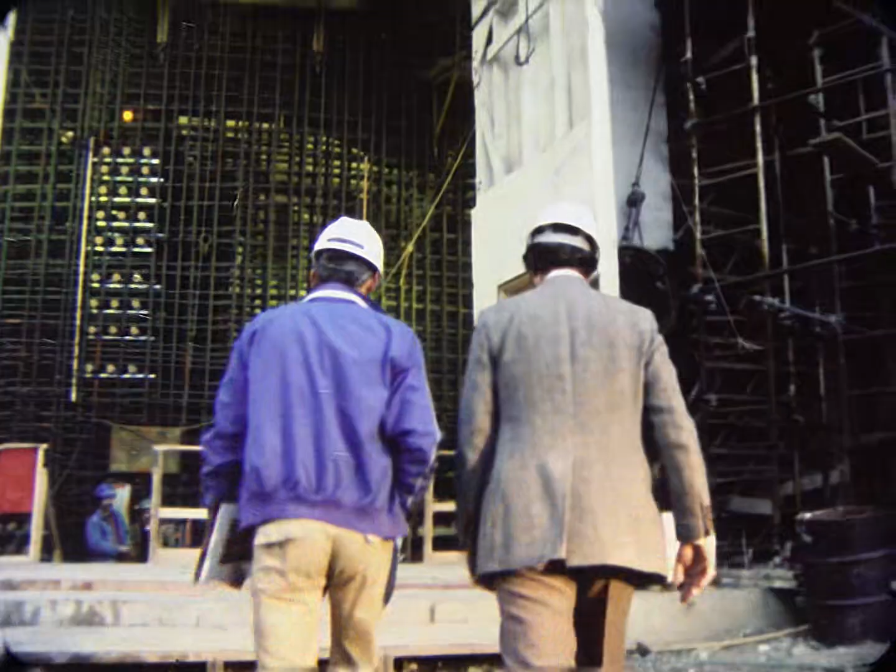There's one thing that we have to make sure we tell the public: it's not our decision whether or not a nuclear power plant's going to be built. However, if it is going to be built, we want to make sure that it's built safe. That's what our nuclear codes and standards are about. Nothing can be safe unless there are rules to assure that safety, and they have to be clearly written rules that manufacturers can follow and regulatory agencies can enforce. This plant will harness nuclear energy for peaceful purposes.

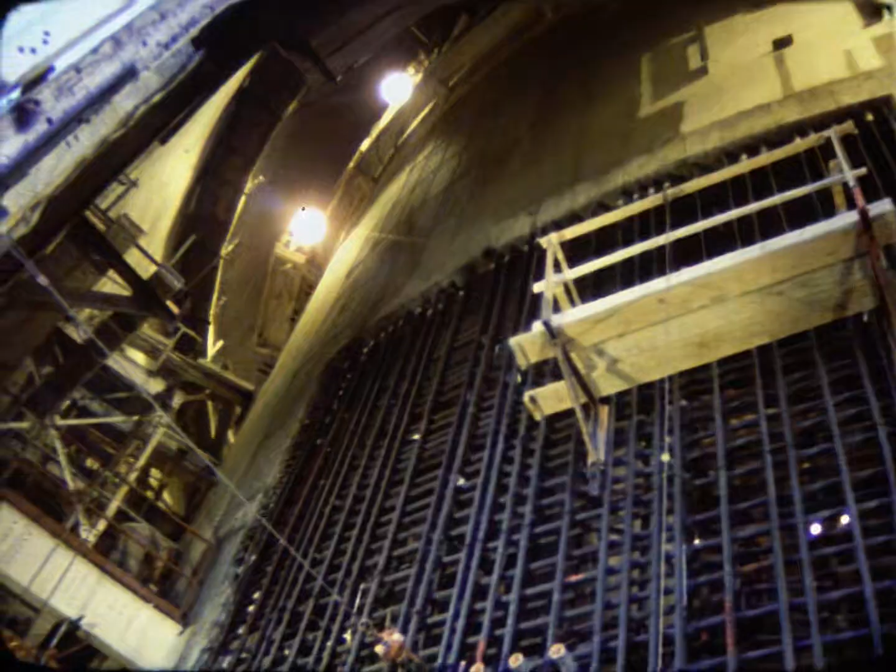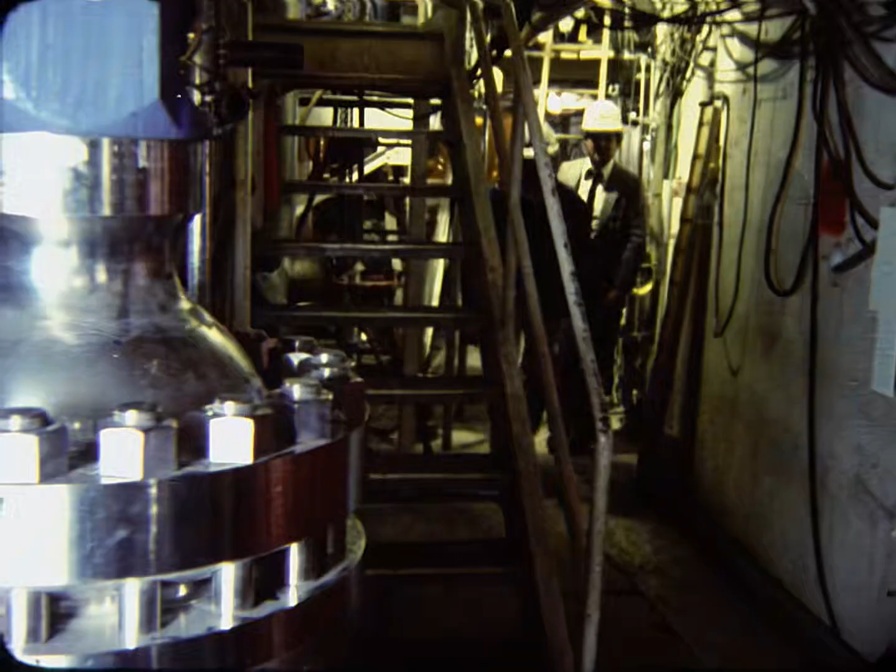There are ASME codes and standards for the reinforcing bars, as well as the concrete that will encase them. Rigid standards cover the heat exchanger. These same standards require the manufacturer to have a rigid quality assurance program and a third-party inspection agency. If the manufacturer meets all the requirements of the code, he may apply the ASME stamp on his equipment.

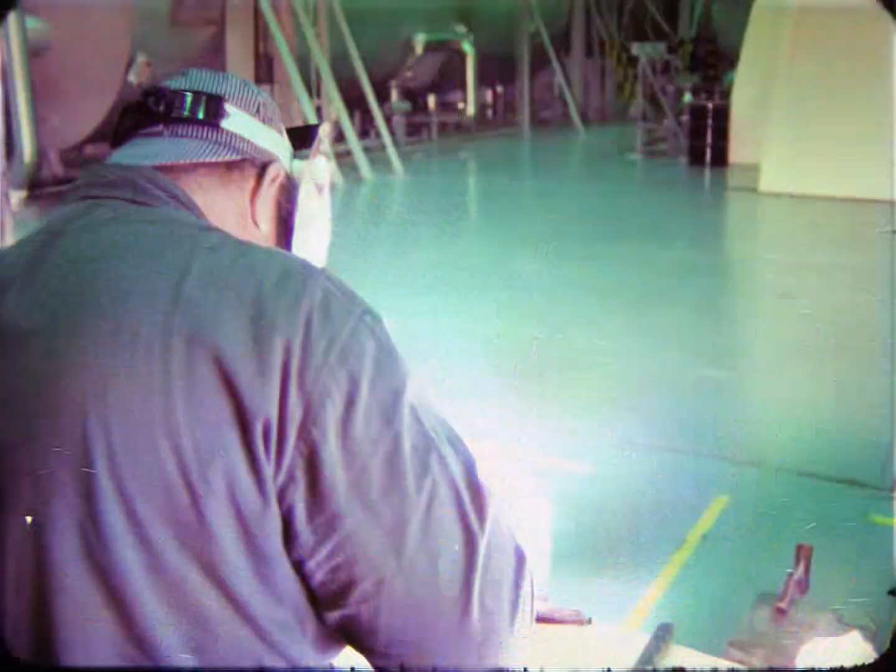ASME standards apply to the great turbines and pipes that lead into them, and they apply to the testing of parts that rotate within, as well as to the generators. The result is electricity. All of it has to be done by the book.

We're not a bunch of scientists working in an ivory tower somewhere. Any code that's developed in the ASME system has input from the entire society—that is, general interest users, the consumers, if you will. Actually, yes, engineers. For instance, right in this room, there's 4 of us here.

You're an engineer, but you're basically a manager rather than a guy working with your hands. I'm an insurance man—I happen to be an engineer, but I represent the insurance industry's interest. And here's Ed, he's an enforcement authority, but he's active in developing the code. And here's Marilyn—she says, I'm purely an administrative type, but she's active in code development too. So right in this little room, even though we don't normally work in closed rooms like this, we've got 4 separate and distinct interests involved.

I think it's important that everyone has a say, and that we tell everybody that they can participate. In other words, it's a consensus system.

Gentlemen, have your attention please. You all have copies of the agenda. The proposed standard was attached to the minutes of the last meeting for your review. I cannot understand how we can have a standard that is going to cover all these items and not know when we've met the standard. We don't know if we've met it after design or fabrication, operation, or licensing. How do we know when the requirements have been met when it's one standard?

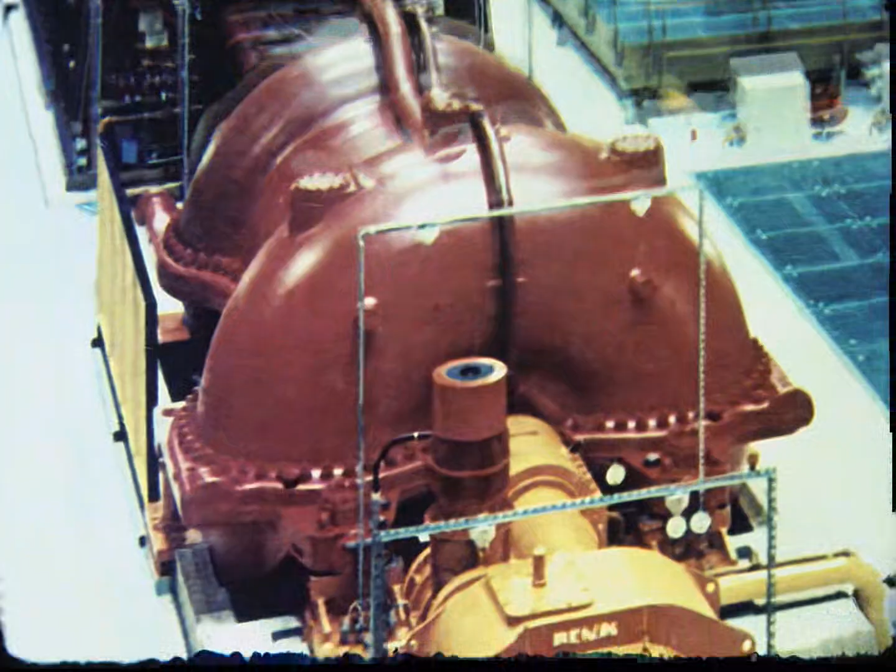When the give and take of debate culminates in a vote, it's 10 to 5 for acceptance of the new crane code. But those 5 dissenting votes are not brushed aside—they'll be given another chance for rebuttal and review by the whole committee. And then, finally, there will be a new and revised ASME crane code for public scrutiny and comment.

Bear in mind, the mechanical engineers and others involved in the development of codes and standards are not the cop on the beat. They can only write the rules, not enforce them. ASME offers industry and the public some very important guidelines in the name of safety and economy, based on scientific principles and scaled to human needs. And that's the story of ASME codes and standards. I hope we've nailed it down.